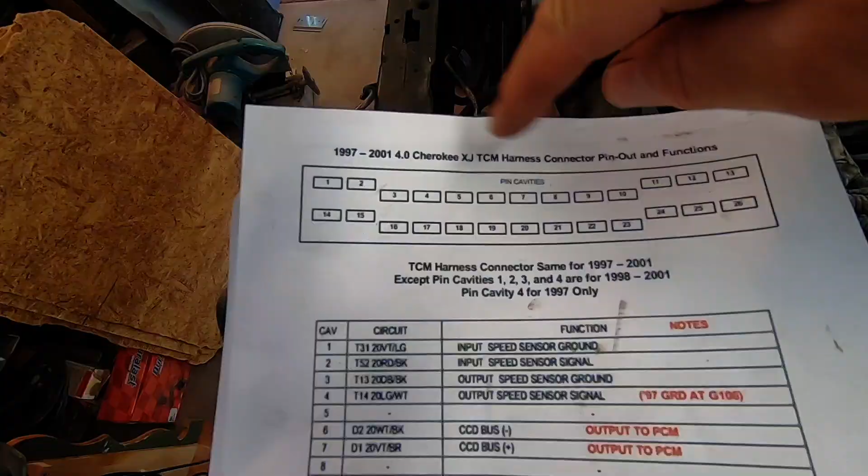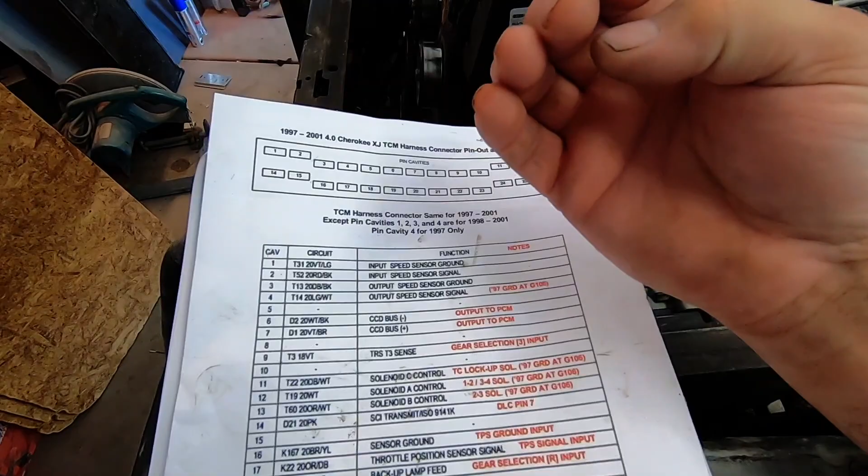Well, I was ready to throw in the towel and start ripping this thing apart and scavenging this one for parts. And Martin said, whoa, whoa there, Lightning. Don't give up yet. So he went home and did some pondering. He asked me to check the transmission controller pinouts. So I found this sheet online, and that's the 9701 pinout connections, and he asked me to check these last three, 24, 25, and 26. This would be the connector with a little catch at the top and facing the pins.

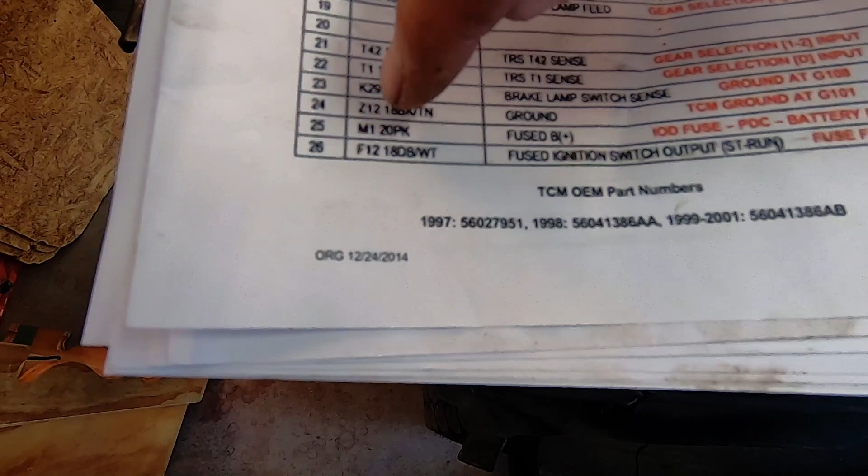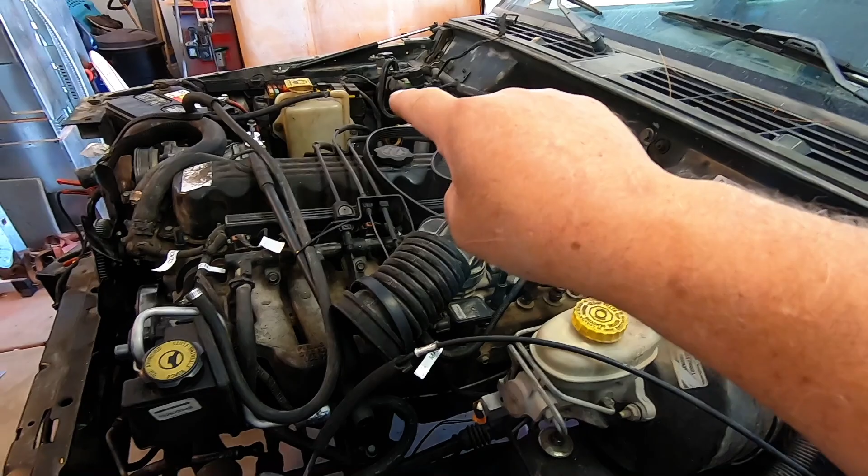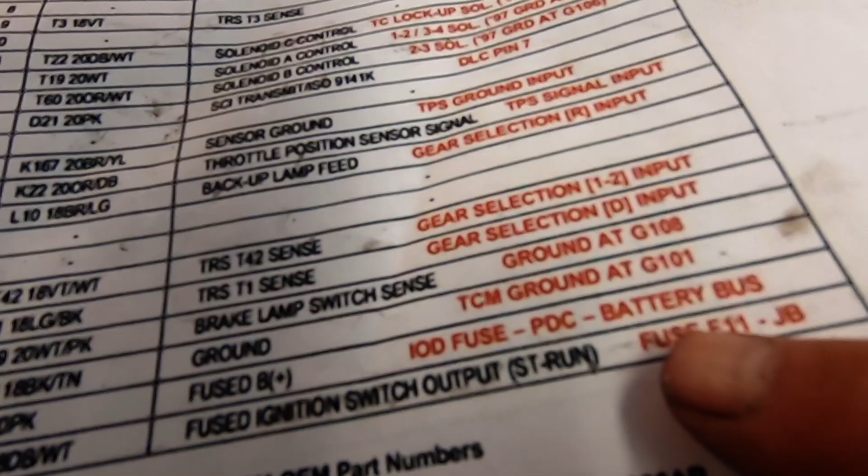So 24 is ground, right? 25 is fused 12 volts, and that power comes off the power distribution center. That's over there. Everything checked out over there. And then he asked me to check circuit 26, fuse ignition, output, start run, fuse 11. That's down in the kick panel, in the fuse box there. I checked that fuse and it was good. I sent him a message back and told him what I'd found, and he said, dang it, I was hoping you'd just find yourself a blown fuse.

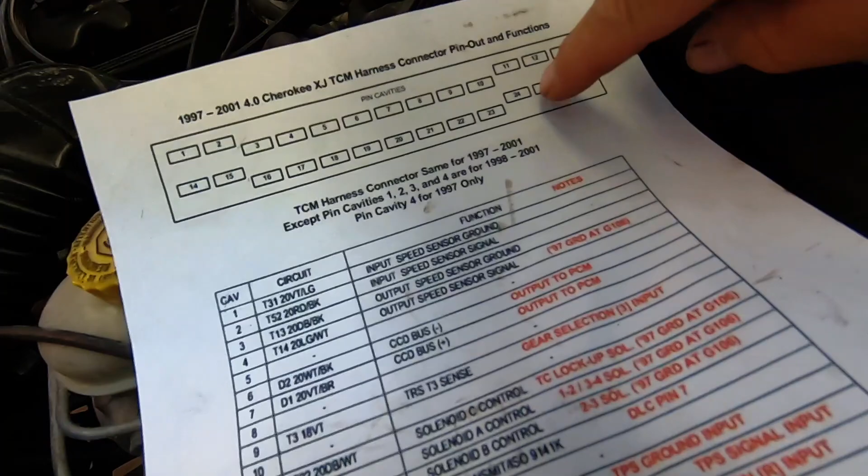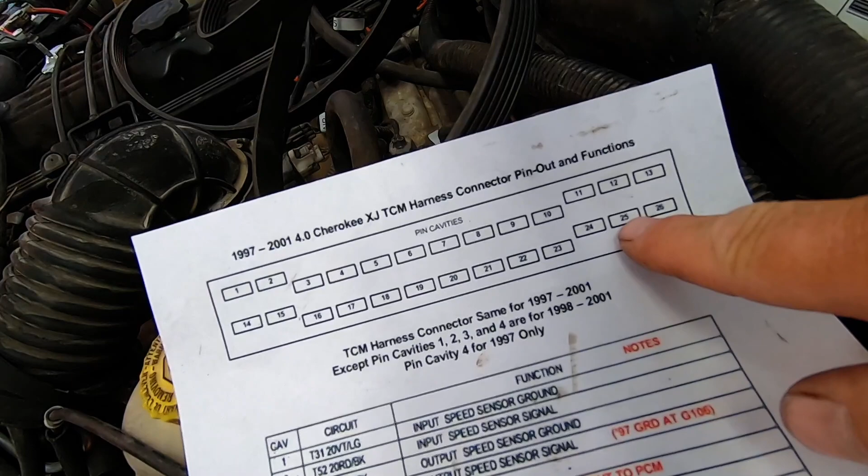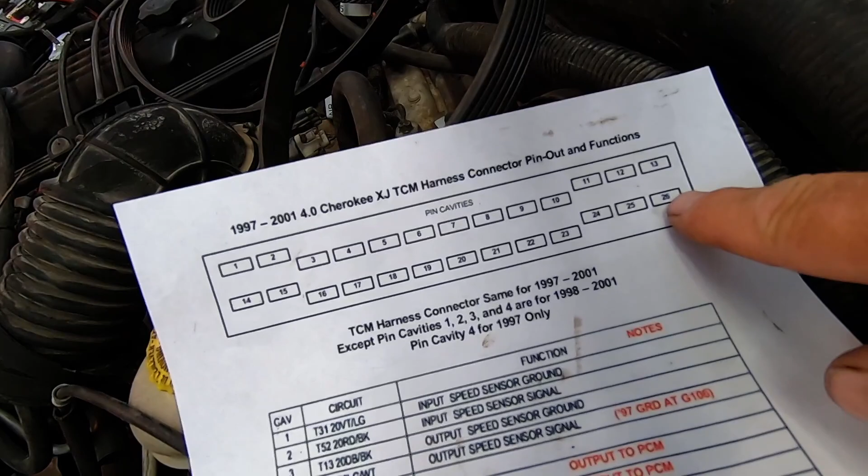So I started probing these, and I stuck my negative probe in number 24, positive probe in number 25, and I got 12 volts constant. Turned the key on because this is switched power. Left my ground here. I've established that this is a good ground because I'm getting voltage here, and I probed this and nothing. What I needed was a service manual.

Well, to buy an actual book, which I prefer to have, a service manual book, an actual book with pages, you know, kind of that medieval technology. I prefer books. I like books.

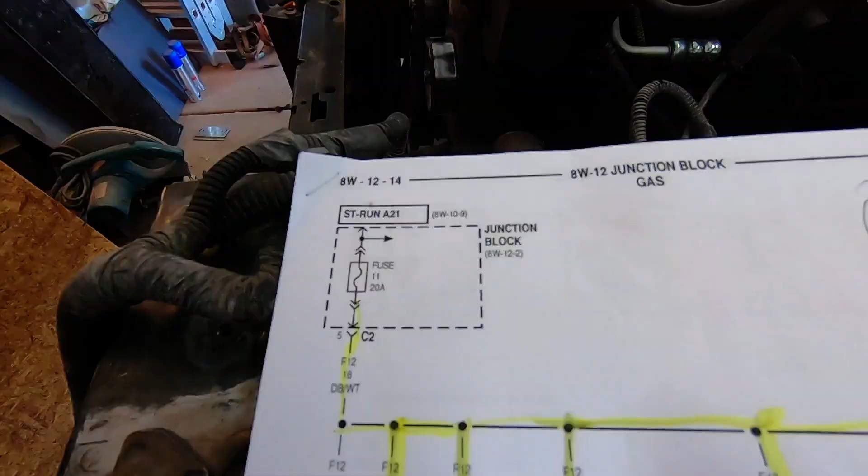Anyway, I found the actual shop manual, right? The service manuals. And I found that circuit. It all feeds off fuse 11 in the junction block. That's the one that's inside the cab on the passenger side in the kick panel. Fuse 11 comes off here and it gets split off, and it feeds switched power to the transmission control module.

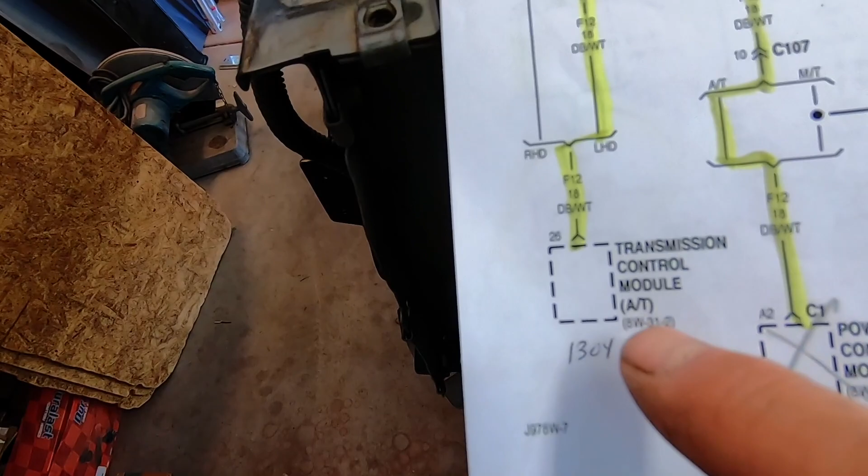It feeds the automatic shutdown relay, the cooling fan relay, the AC compressor clutch relay, and the fuel pump relay. It also feeds power to the powertrain control module, the evap purge solenoid, and the transmission range switch. I tested all of these and they passed. More on that in a minute.

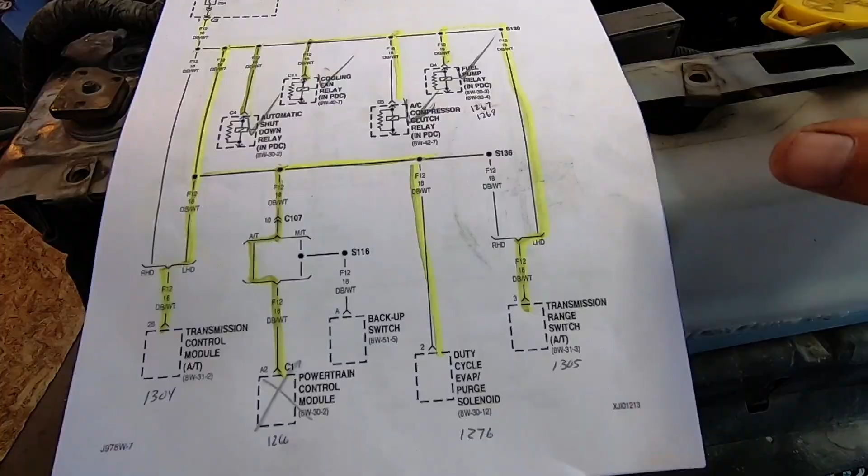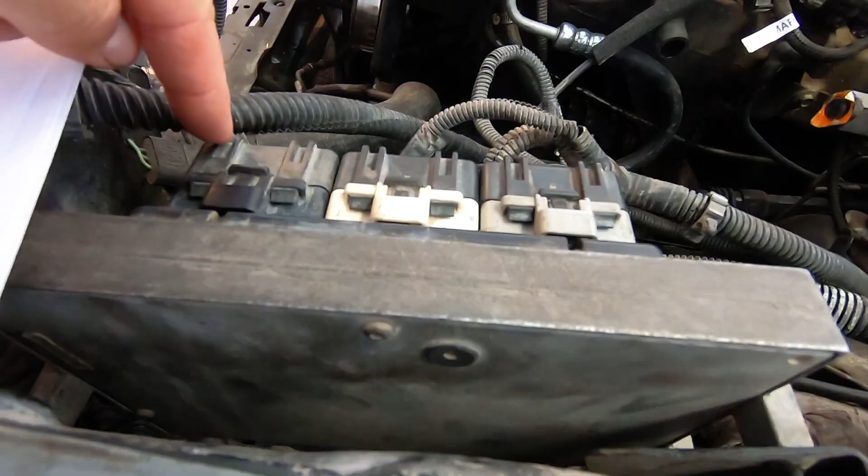Went through the manual and I found all these pages that pertain to these different circuits, and I just started testing them. This is the powertrain control module. This should be 12 volts fused ignition start run in A2, plug A, second pin. Tested that, passed. Evap purge solenoid, C20, plug C, 20th pin.

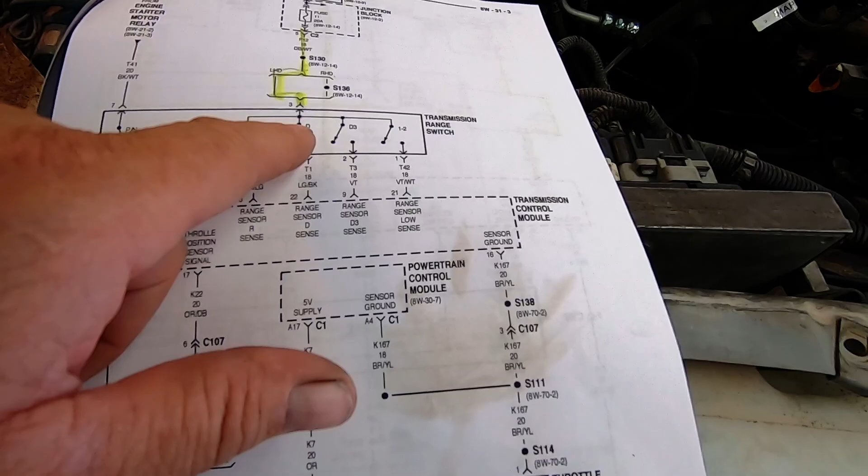And when I got to here, this is the transmission range switch, and you can see here it comes from the junction box, feeds power to the switch, and then that feeds your inputs to the transmission control module. So I tested the pins coming off the range switch to the transmission control module. These all passed. The only thing that wasn't getting 12 volts switched was pin 26 on the transmission control module plug.

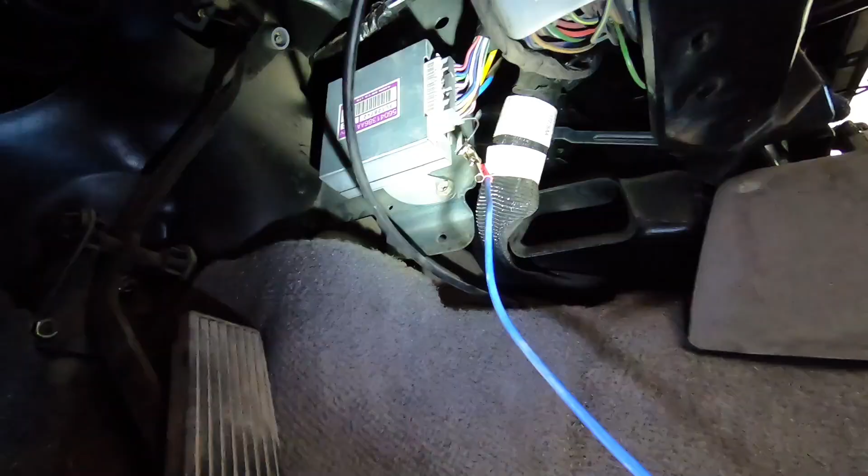Okay, so I've got a small probe plugged into the dark blue with a white stripe wire. That's the switched 12 volts. Plugged it back into the transmission control module, and I've got a jumper wire running from switched power over in the junction box feeding to that probe. And let me disconnect this. So let's look at the scanner here. I've unplugged that little switched wire.

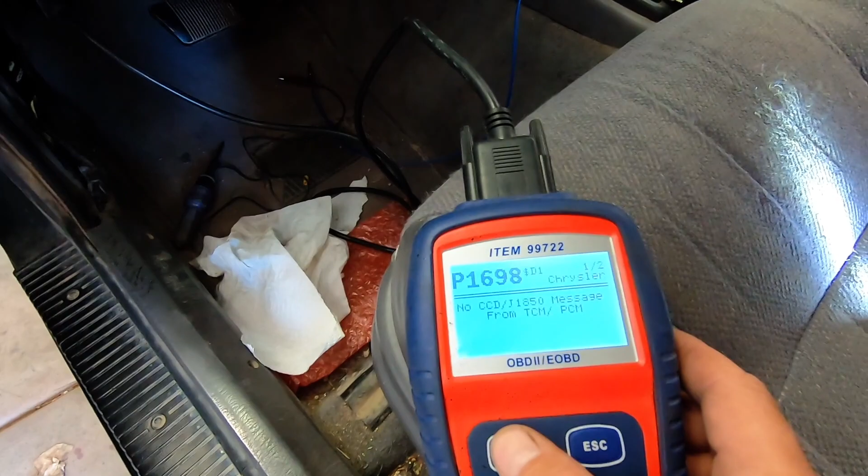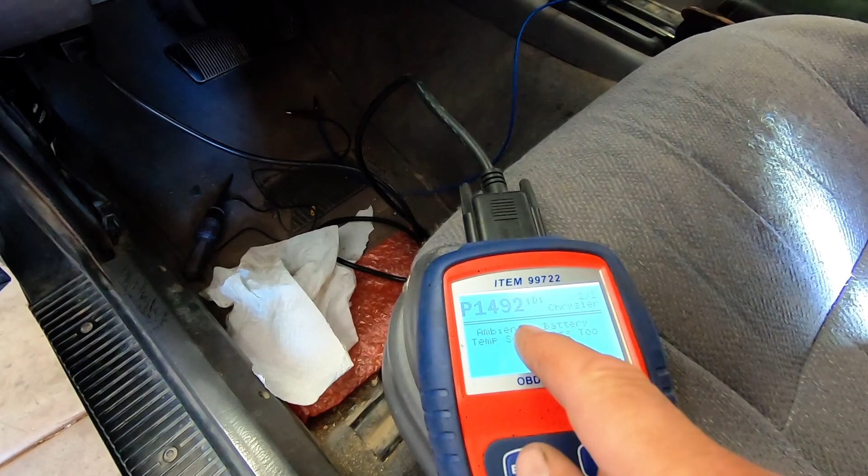Reading codes. P1698 and a 1492, which is the ambient. It's the battery temperature sensor. And this is going to trip again because the battery tray, which includes the battery temperature sensor from this vehicle, is over in the blue Jeep. So this is going to trip again. Okay, so before I clear this code, I'm going to hook this wire back up.

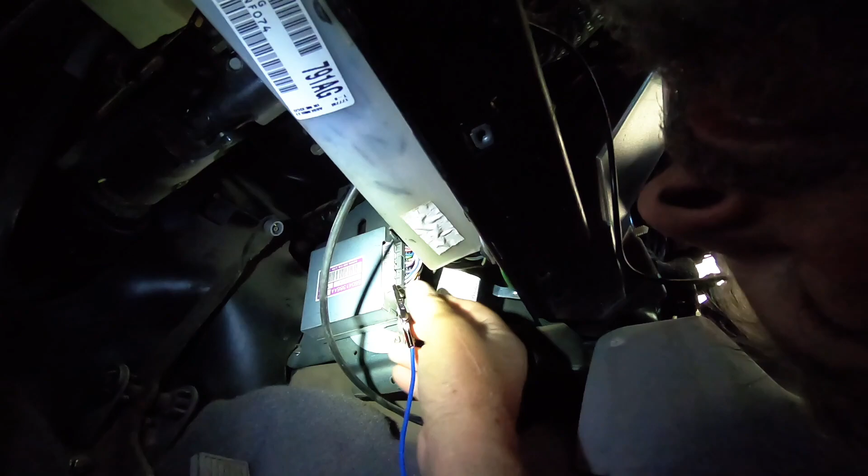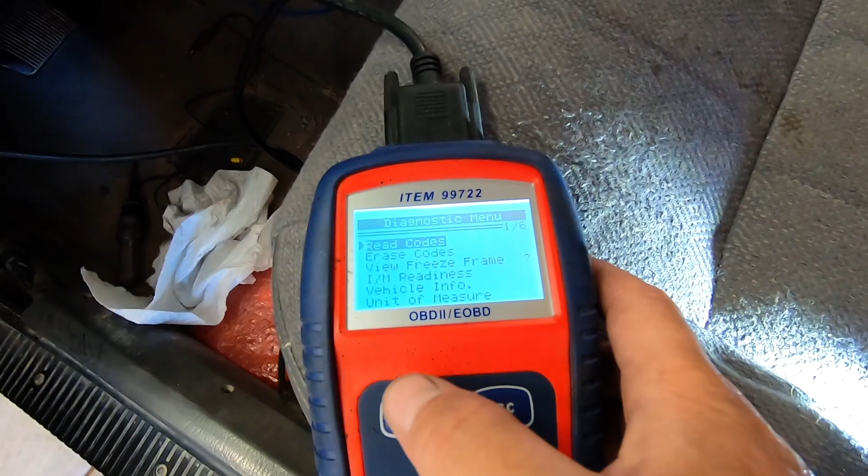Okay, that wire's hooked up now. Now I'm going to erase the code. Turn the key off, turn it back on. Of course, like I said, that 1492 is going to come back. Let's read the codes now. Stored codes: 1492.

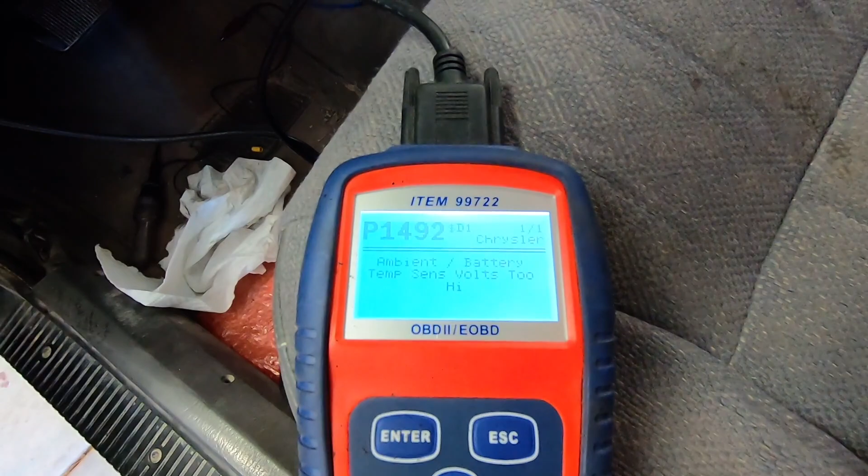No more 1698. So if you have a 97 through 01 Jeep XJ and you've got a code P1698 and you've checked all the grounds, you've cleaned all the connections, there's no corrosion anywhere, and you still can't get rid of that code, go to your transmission control module plug and test pin 26. That's fuse 11 in the junction box. Check to make sure that fuse isn't blown.

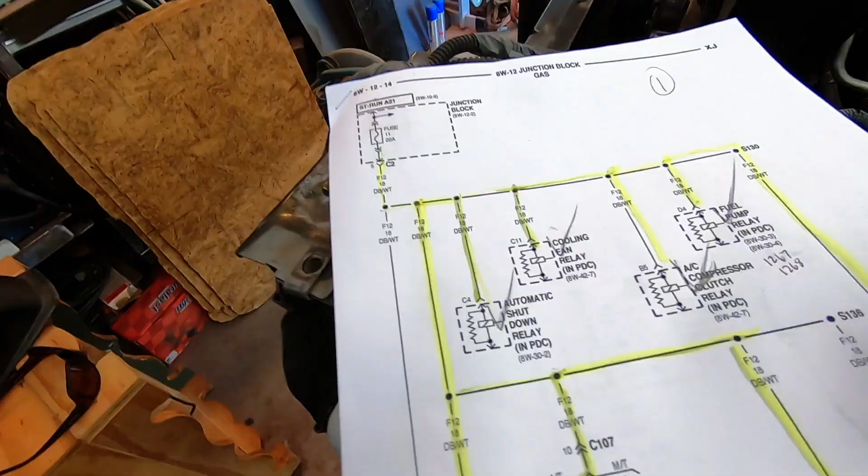If it's not, take a voltmeter and probe that dark blue with a white stripe, number 26 circuit, and check that for 12 volts. If you don't have 12 volts there, you're going to trip that code every time. There has to be a break in the wire between wherever the splice is. There's two splices, splice 130 and splice 136. There's two places where this break can be, this disconnection in this wire.

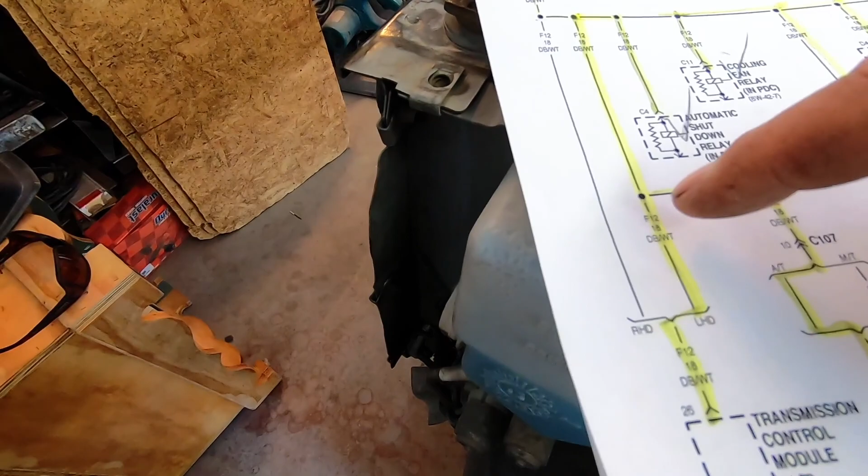So I don't know where it's at, and quite frankly I don't care. Because everything else is working, I'm going to just assume that it's somewhere between here and here. So I'm just going to run a jumper wire from a switched source on the junction box, put an inline fuse on it, and run that to the transmission control module. Problem solved. You're welcome.

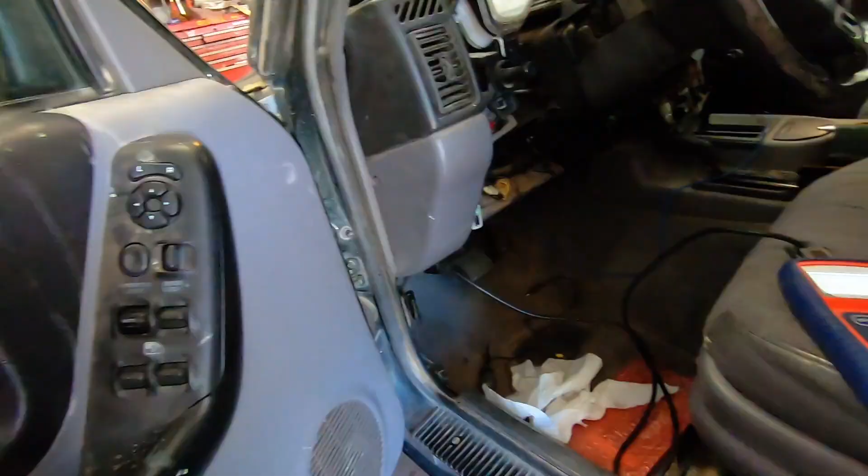So while it's in the garage and tore apart, I'm going to take these door panels off and inspect the wiring that goes into all these switches, because you know I've been having issues with that. We found one in here last year that was broken. I'm sure there's one over there. I'll mess around with some of this in here. Back doors as well. Anyway, I got some electrical issues to work out. Work on that for the rest of the week, and maybe this weekend I'll strip that thing back down, put the parts back on this, and drive it.

Unless something else fails catastrophically, this is going to wrap up the series on the engine repair and the transmission issues that I've been having. I'm fairly confident now that that's going to be an adequate fix. And if it's not, you'll probably see a follow-up video.